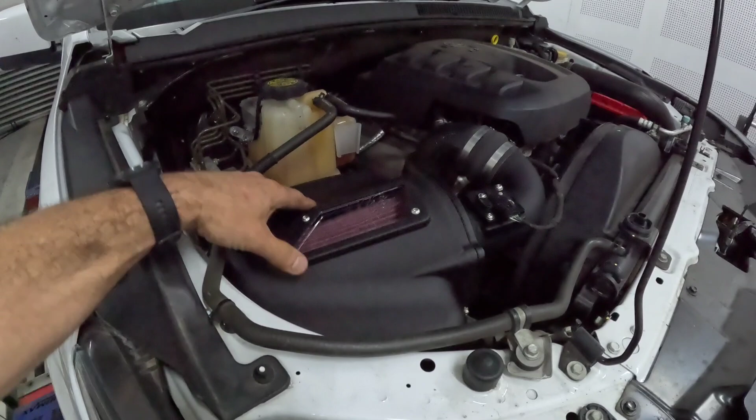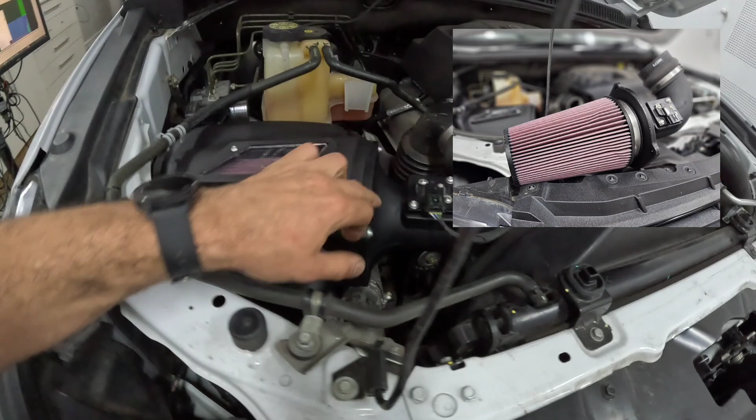What we have here is the K&N full intake system, an absolute awesome bit of gear. A full sealed box with the K&N air filter inside, fully reusable. It comes with a nice intake pipe, a bell mouth built inside, and it all hooks up to the existing pipework under the guard. A really good bit of gear, and we've got these on our online store.

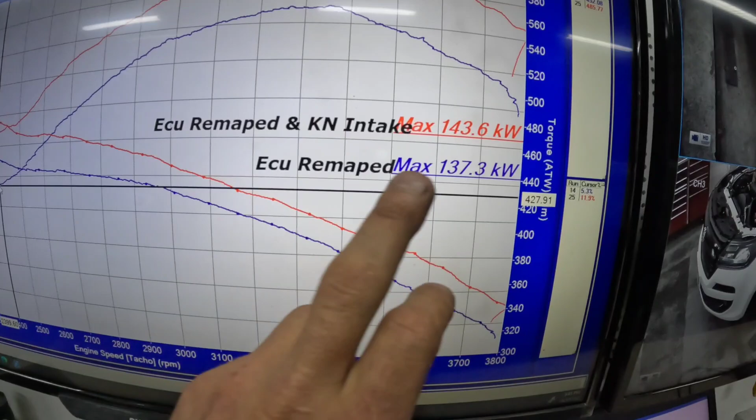But the real question is, does it give the power that K&N claim? Because they always tend to claim more than what you'll realistically see. So we've done a back-to-back test on the car, from tuned to having the intake fitted. The blue line here is the baseline with the factory airbox and one of our ECU remaps, 137 kilowatts at the wheels. Then we put the K&N air intake on, and this is the result.

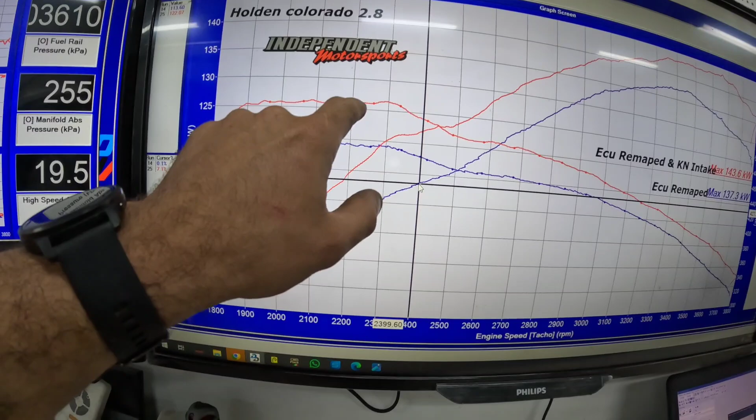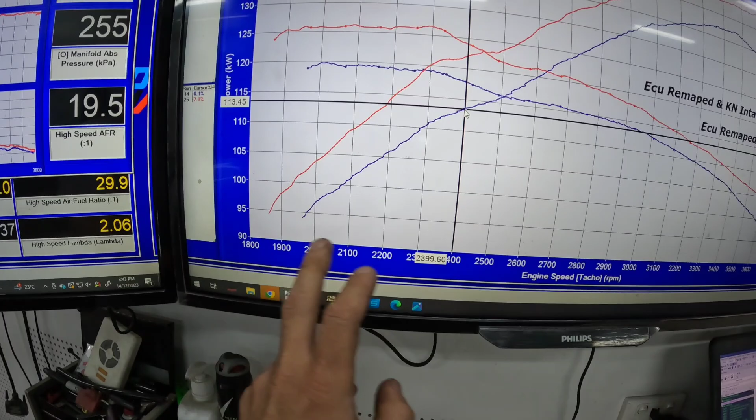It's gone up to 143 kilowatts from 137, but more importantly it's gone from 460 Newton meters off the bottom to just on 500 Newton meters, around 2,400 revs. We've picked up the most torque increase from about 1,800 to 2,400 revs. That's a good low down increase in torque, a good 40-odd Newton meters straight off the bottom, and that's without wringing its neck out.

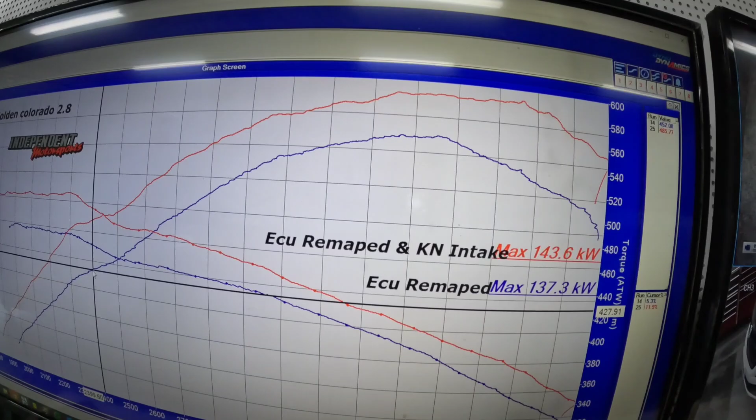As the RPM increases it does start to roll back, so not as big an increase up top, but lots in the bottom end where you actually drive it under the curve. Even though power is increasing the whole way and holding more in the top end, I believe this area in the bottom is what's going to make you go, wow, this actually feels a lot nicer. So you get two benefits out of putting one of these intakes on your car.

One, you're going to make more power. It's going to clean things up, it allows the turbocharger to breathe a lot nicer, and it actually leans off the fuel mixtures just a little bit.

But not anymore. We've now got these intakes in stock, we'll be selling them all the time. This is what we're going to recommend people do.

So if you're interested in doing one of these and combining it with an ECU remap, these are the sort of gains you could expect to see. However, if you've just got a standard one and want to stick it on there, you'd expect to see around 20 Newton meters increase over stock. But combine this with an ECU remap and it's just primo, it does exactly what it needs to do.

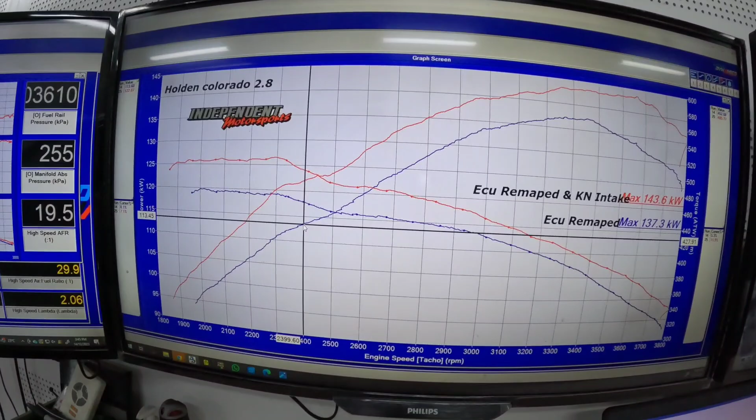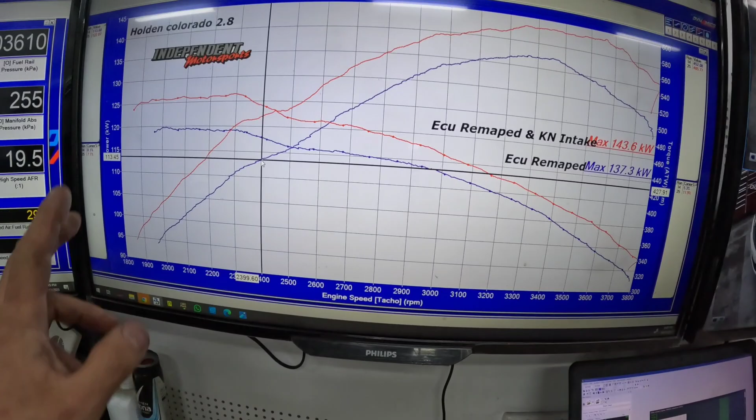We're not doing these things just for the sake of it, we always want a benefit out of it. So just to touch on it again, a good low down 40 Newton meters of extra torque off the bottom from the K&N airbox, with no changes at all to the tune. We could add a lot more fuel and tickle it up a bit more, but it's sort of at the sweet spot where it is now, so I don't feel we need to make any tune revisions at all.

Anyway guys, I hope you enjoyed that. If you've got a Colorado and you're not too sure what to do about the factory airbox, look at the K&Ns. They're a really nice arrangement, all made out of molded plastic, using a reusable filter and so on. If you've got a friend who's interested, or know someone, pass these details on, show them.